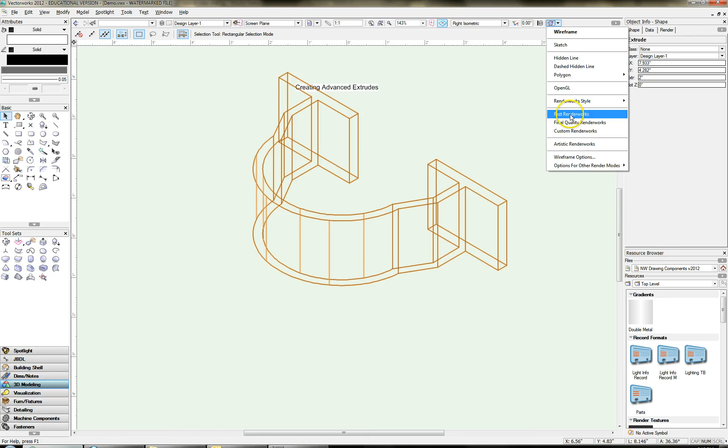The true test, though, is you need to do a render, a fast render works. And yep, that was exactly right, everything is filled in. You will know that something didn't work out when you do a render like this and it looks like it's just a wireframe model, or it looks like there's no fill on the inside. There will be walls here, but nothing on the inside. This drew out and extruded properly.

Now I'm going to show you the way, if you do have errors, that is more foolproof and will work. What I'm going to do is Control Z out of this. So now we're back to our lines. What we're going to do is draw the polyline over the top of it.

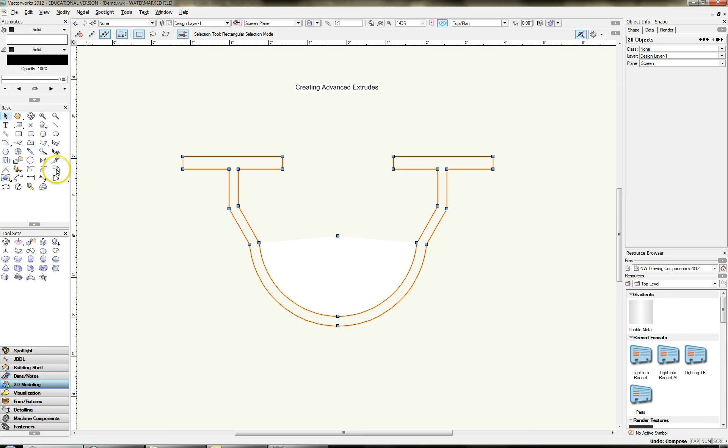If the Compose command doesn't work, this is the best way that I know to get it to work. So we're going to choose the Polyline command, using the corner vertex mode and the point on arc mode. I usually pick a point in the corner to start, and we'll click and just kind of go down, making sure we click on all the endpoints so it's exactly what you drew.

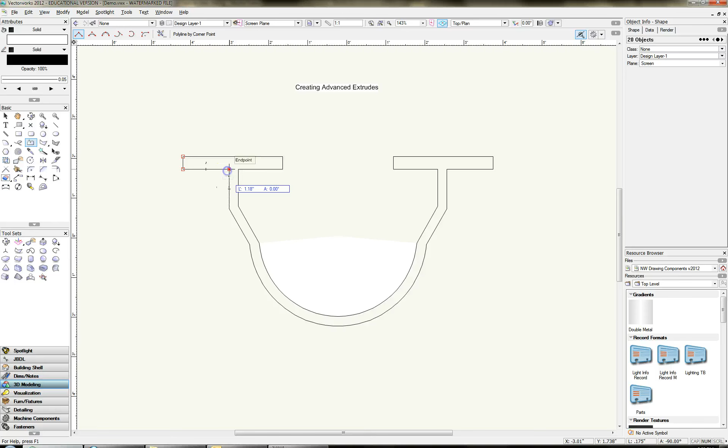Let's say I draw off to the side here and it's not right — all you need to do is hit the backspace button, and then you can take it again. Now we're at this curve, so I'm going to come up to Point on Arc, select the center of that arc, and come back here and select the end of the arc.

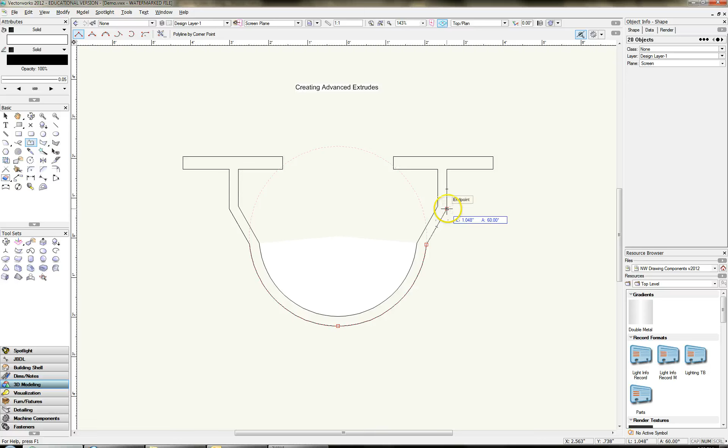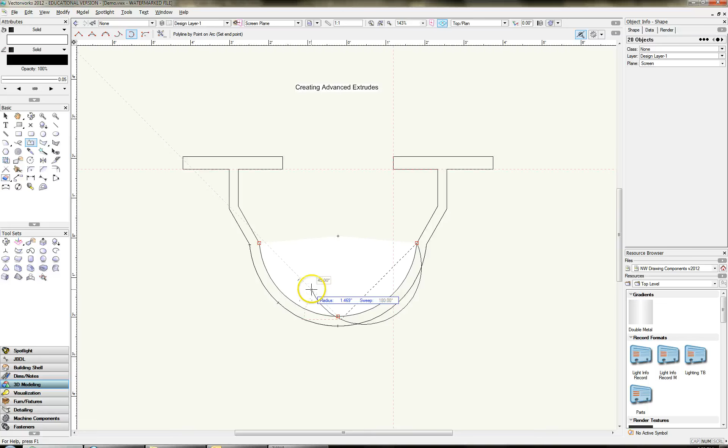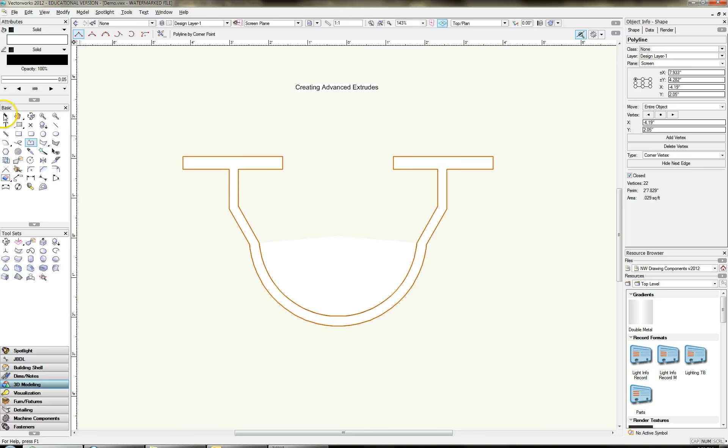Now we need to go back to the point, endpoint, endpoint, endpoint, endpoint. So we just kind of keep going along here, and now we get back to click on the midpoint — and I missed the spot here, I'm going to try and do that again. Midpoint, and right there we go back to here, endpoint, endpoint, endpoint, endpoint. Now you see once it's closed, it makes our polyline.

So we'll come up to Model, Extrude, 2 inches, and again let's take a look at this guy in right isometric. Now what we can do is get rid of this guy. Let's do a quick fast render to confirm that.

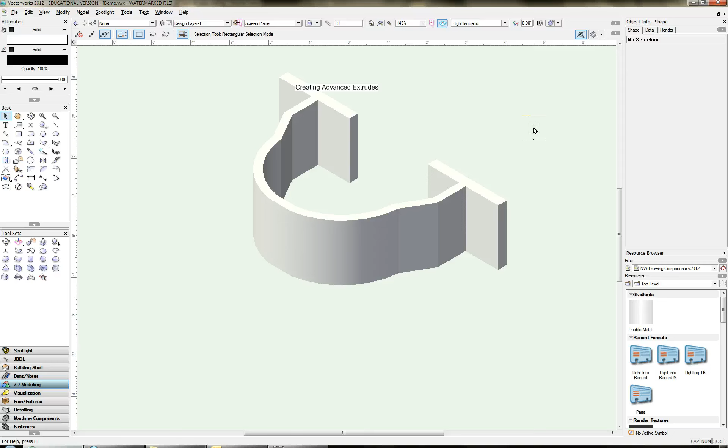Looks good. Now I'm going to show you one little trick here, how to rotate. Because right now I want this — right now we're looking at it in the top view, but I want it to look like this in the front view. So what we're going to do is come over here and look at it from the right side view. So here we are.

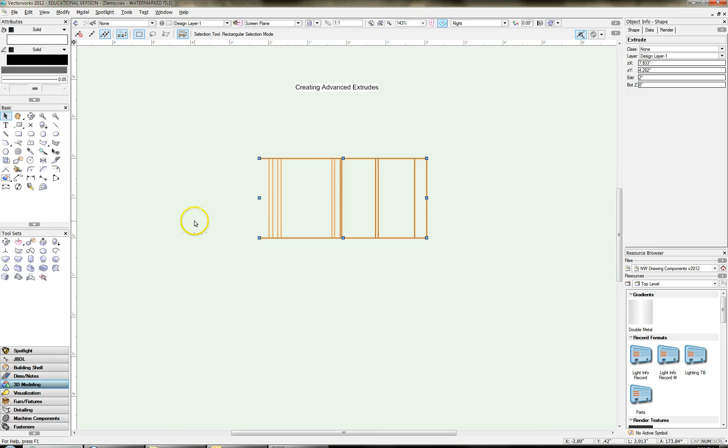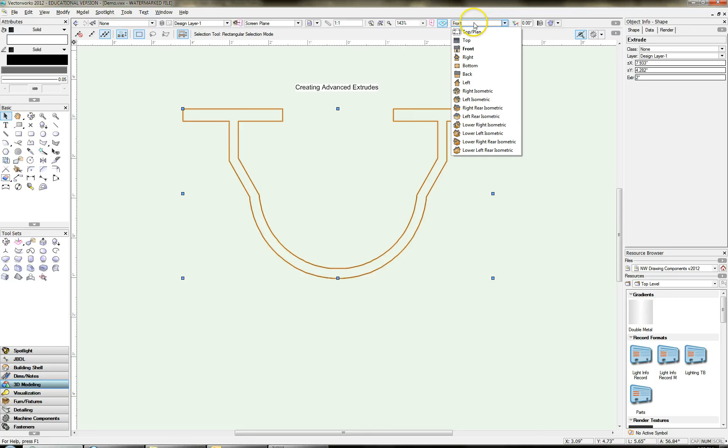I'm going to select everything, and then we're just going to rotate it right on the endpoint, right up here, and flop it up. Click it, I'll move it back here. Here we are now. So when I look at it in the front view, there's the front. Here's the top plan. And here we are again in right isometric, and we can render it any way we want.

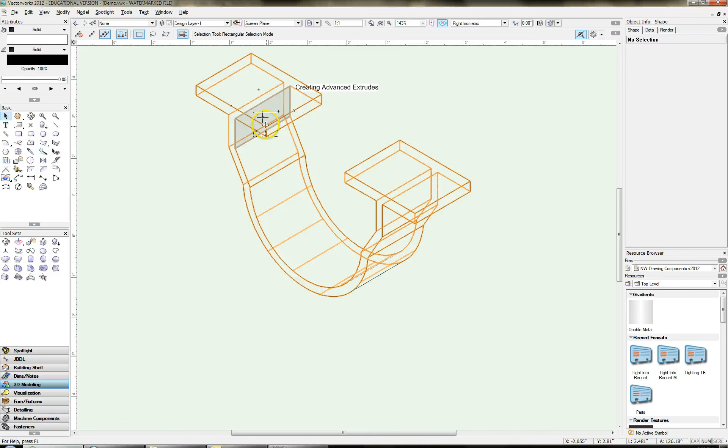This is going to be a dashed hidden line, I believe. Well, okay, yeah, here's our dashed hidden line rendering. So right here — okay, anytime you move a rendered object, it will ask if you want to re-render it again or go back to wireframe. I'm going to hit re-render, and there we are.

So in this video, we looked at two different ways to do a more complex or more advanced extrude, and as a bonus, you learned how to rotate extrudes. So thanks for playing, and happy drafting.